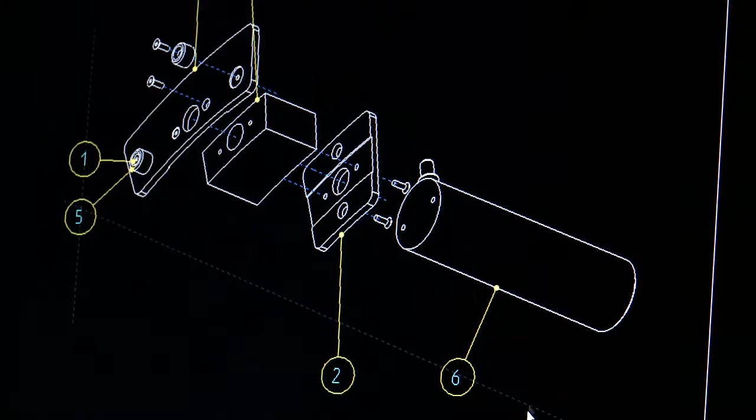Frecon is a company founded in 1999. Today, we are an innovative business which focuses on constructions, calculations and documentation.

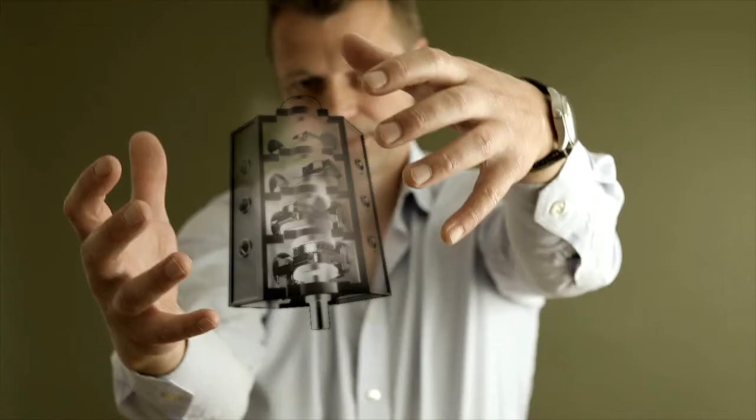At Frecon, our employees are our most important assets. All our employees are highly professional, creative and committed, and that is exactly why we are able to meet the high demands of our customers.

We are able to become part of the customer's own development team, or alternatively be part of all stages in a project, from the idea to the final product. We are in ongoing internal as well as external meetings with our customers in order to adjust expectations and continually optimize and develop the project.

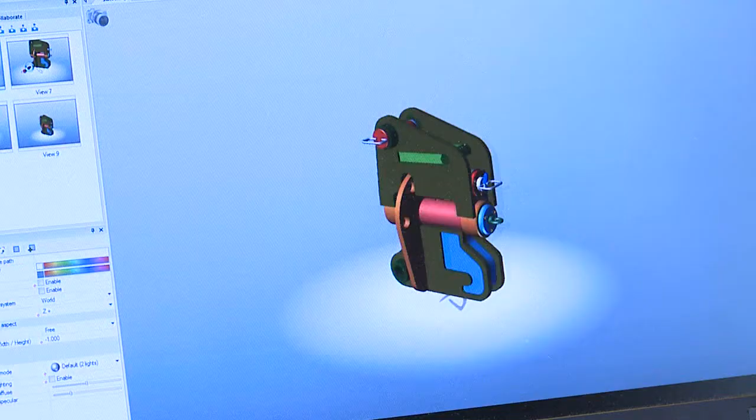All our designs are made in 3D, which gives us the possibility to use the material in our visualization software. In this software we can make short videos or presentations showing the product. Being able to visualize solutions at this stage makes it easier to take decisions on costly projects.

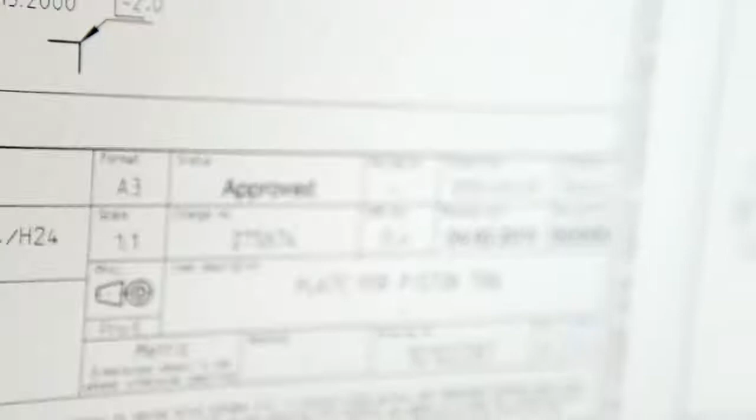Many of our projects are optimized by our FEM calculations. These calculations show if the construction can withstand the specified workloads.

At Frecon, our goal is, through our committed employees, to turn your project into a success.